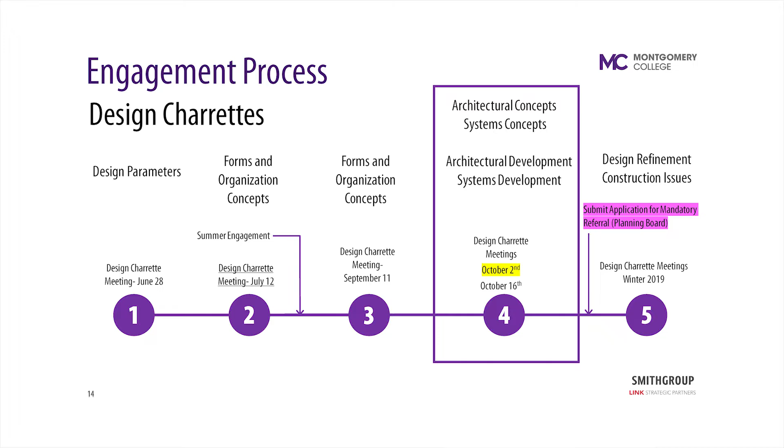Before I turn this over to Bob, let me just remind you we're in stage 4 of a 5-stage process, so we're making some really good progress together. I want to highlight that we have another meeting coming up on October 16th, but I don't want to understate the fact that this process has been moving along. So if there's something you've been holding inside that you really wanted to make sure we know, tonight would be the meeting to let us know.

Or in an email or a phone call in the near future, because we are moving to making one determination together and then moving something as an actual project into the review process. So make your voices heard tonight, bring in the feedback, and we'll keep going from there. And with that, I'll turn it over to Bob.

Thanks, Michael. So again, my name is Bob Bull. I'm a principal with the SmithGroup here in Washington, D.C., and we are the architects and engineers for the Montgomery College Math and Science Building.

One thing I wanted to point out on the schedule too, as Michael was saying, we're on October 2nd here. We have one more meeting in 2 weeks to talk more about the design. You're going to see a very developed design already tonight in some of the later slides, around slide 110, 120. No, I'm just joking—we don't have quite that many.

But the important thing to note is that we were going for mandatory referral after the 16th, October 16th. That is a county requirement that we submit our design for their review and consideration. There will be opportunities to continue to engage after that point, and we're targeting the winter of 2019.

As Michael was saying, this is a really important stage in the process to glean the important feedback that you guys all have, so that we can inform the design with those comments. We're at a really critical stage between this meeting and the next meeting. Hopefully you guys are all on board with us, and we can make it a fulfilling process and rewarding for both sides.

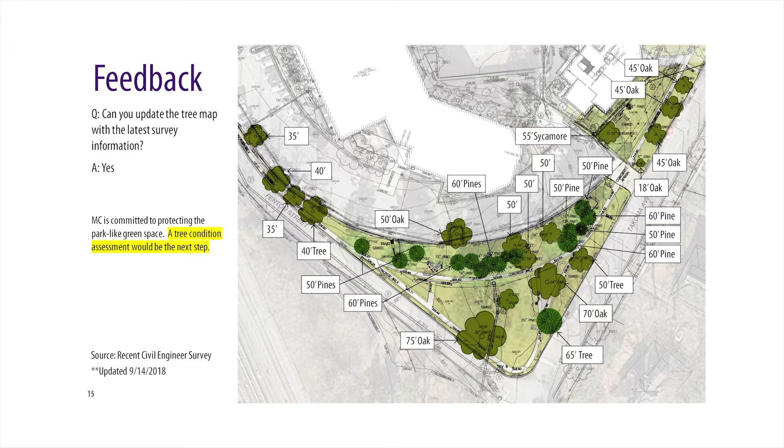We've gone ahead and updated our base information, and all the renderings and images you'll see from this point forward will include those 3 trees.

There was also a question about where the site context information is coming from. We go through this kind of exercise quite frequently with campuses and other clients with very complex context situations.

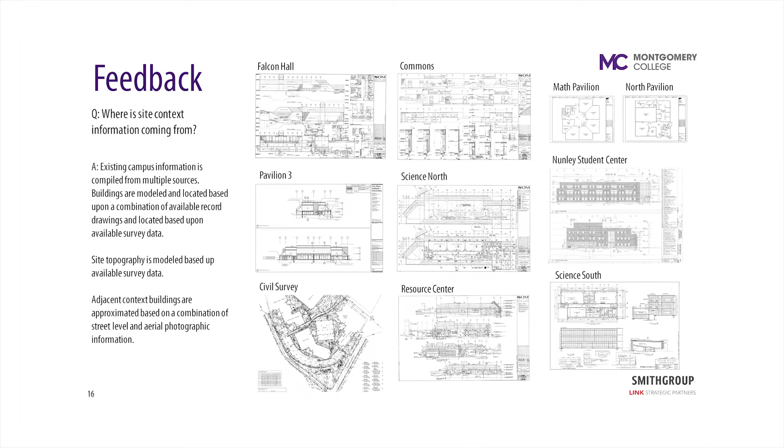We've done pretty exhaustive due diligence on the existing buildings on the campus and surrounding area, and compiled that information into the 3-dimensional tools we're using to represent the designs we're sharing with you tonight. There's a high level of accuracy underlying the imagery, coming from detailed building construction drawings, surveys from the civil and landscape team, and records from the county and other agencies.

So we can really trust and be assured that the information you're seeing is actually depicting the size, mass, bulk, and design that we're proposing, and it should look very much like what you're seeing on the screen tonight.

So we'll do a little recap of the last design review from September 11th. We'll move through these pretty quickly, but there were some original design directives that we started this process with.

We wanted to keep the current setback of existing Falcon Hall, which is basically that 110-foot setback from the curb line of Takoma Avenue.

We wanted to protect the park-like green space on Takoma Avenue, that triangular area I mentioned earlier, where the existing trees and landscape are staying intact.

Minimize the windows along Takoma Avenue, so from the vantage point along Takoma Avenue, we minimize any kind of light trespass that would occur in that area.

Ensure that height is no more than 2 stories on Takoma Avenue. This is where we developed our own methodology for measuring height - we established a 70-foot setback from the 110-foot setback, which is that 2-story building zone we're limiting the current design to.

Take advantage of the existing topography to minimize the perceived height. One interesting site characteristic is a 10-foot grade change from Fenton Street down to the tennis court area, and we're using that to basically conceal one story of the building height in the concepts we've shared previously and tonight.

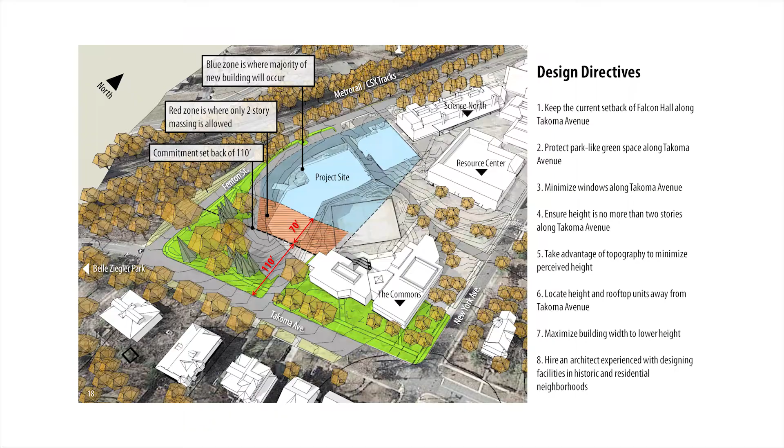Locate the rooftop units away from Takoma Avenue, so essentially all the mechanical equipment would be organized close to Fenton Street and away from the residences on Takoma Avenue, and then minimize or maximize the building width and lower the height.

And obviously we are the architects that were hired, so we don't need to talk about that anymore. One important aspect we'll reiterate over and over again is that this is the new age of math and science - we're doing a building for the future, not for the past.

There are specific design elements and components that must find their way into this building that many of us who went to school 20 or 30 years ago wouldn't recognize, but they're critical to the success of this program going forward. A lot of it has to do with active learning, team-based work, engagement with students, faculty, and outside community members within the building. All of these elements drive a different planning model than what we may be reflecting back on from 10, 20 years ago.

Another very important aspect is sustainability. In the architecture and engineering industry we use LEED often to measure the sustainability of our projects. This project will be at least LEED Silver as measured by the U.S. Green Building Council. We'll begin to see, in some of the images tonight, some of the first elements of that sustainability approach manifesting itself within the design of the concepts we'll be showing.

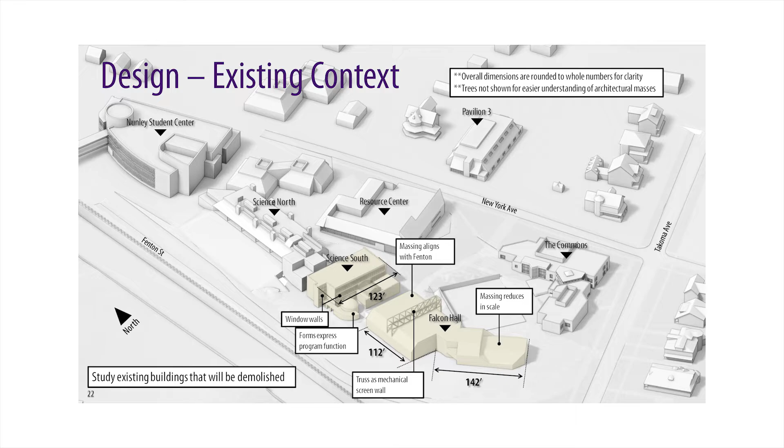Obviously Falcon Hall has a very interesting mass. We can argue whether it's successful or not, but it has a diminished presence off of Takoma Avenue, and that's one of the important aspects we've heard from most neighborhood constituents needs to be maintained going forward. Then there are specific elements within Science South, its window walls and its massing and form expressing the planetarium, unique aspects that we may lean on and leverage in the concepts we develop going forward.

An important aspect to understand is that this site on the campus, between Fenton Street and Takoma, has two distinct faces: one organized along Fenton Street and the other along Takoma Avenue. The general architectural context as you come south down Fenton is distinctly different than what you see coming west on Takoma Avenue.

So north on Fenton, you have the Nunley Center, which is 217 feet wide, and Science North, which is 280 feet wide—significantly long buildings with a very significant presence as you approach from the north going south. That's represented by an organizational rectangle here.

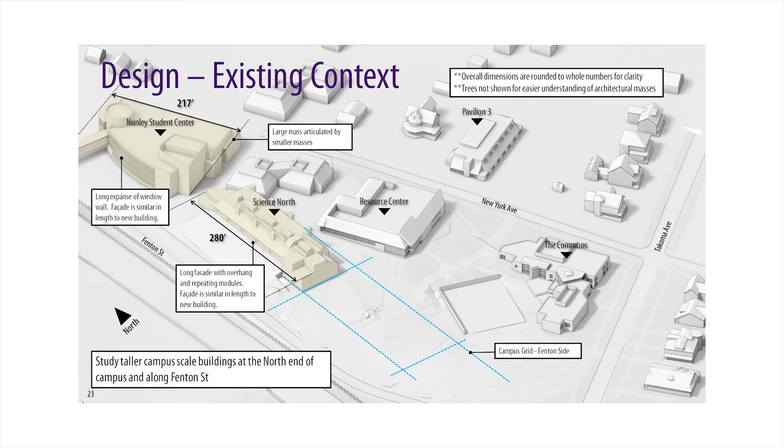If you look at the other buildings from the east—the Resource Center, the Commons, Pavilion number 3, and also the residential context—there's a distinct departure in the massing and organization of those buildings. There's less of a linear rectangular organization, more of a square organization with dimensions more like 150, 165, or 148 feet, radically different than what you see on Fenton Street.

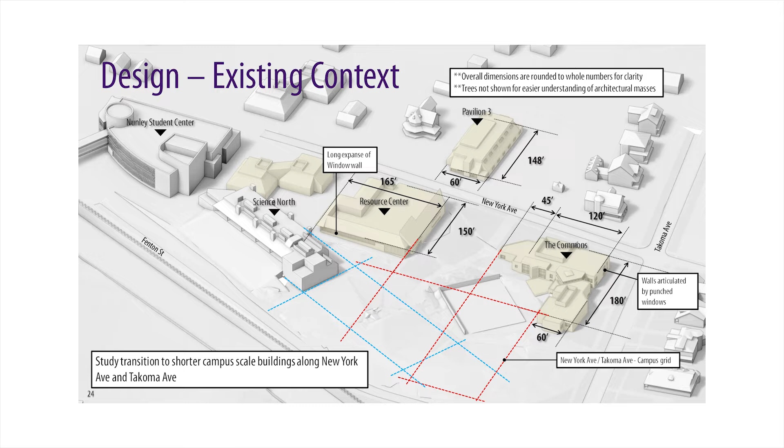What we're beginning to understand is there's a unification of those two sensibilities on this project site—a convergence of this longer organization along Fenton and the smaller scale, more squarish organization coming off of Takoma Avenue. This is sympathetic with the residential character you see across Takoma and across New York. You'll see how that informs and influences the design as we develop the architecture further.

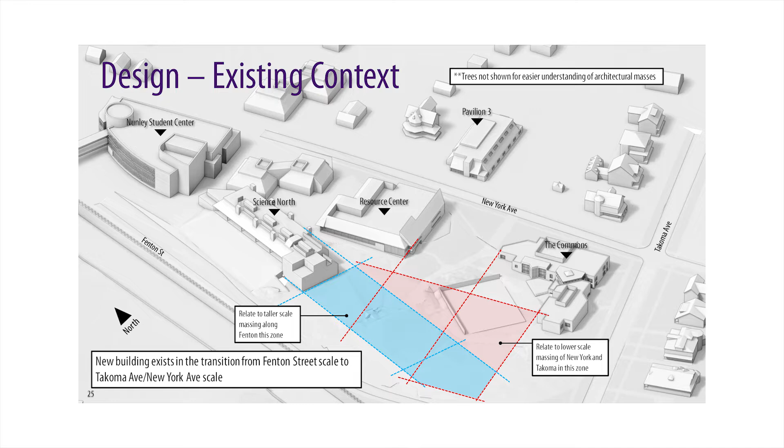Looking further into the existing context, the materiality from the existing campus and neighborhood ties together already pretty well. There's a strong dominance of brick on the existing campus and earth tones. The Nunley Center has a lot of beige and brown brick, the Commons has a lot of beige or brown brick, and Pavilion number 3, one of the more recent constructions on campus—on the other side of New York Avenue—uses a terracotta tile very similar in coloration and tonality to the beige brick seen elsewhere on campus.

There are other elements we're looking at too as we understand the campus, including what comprises the material palette of the residential areas on the other side of Takoma Avenue. It's a radically different scale shift in the architecture, but there are elements that tie across the street, like the landscaping, native planting, and lush greenery—elements we can use to tie things together. There are also lots of stone walls, garden walls, and similar elements with a residential quality that translate well to an institutional campus setting. You'll hopefully see how that works in some future slides as we look at concepts.

Sorry. No, I got it.

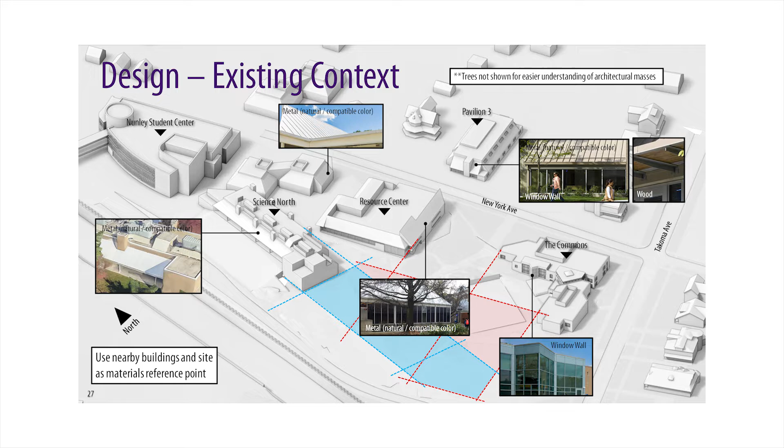There are a couple other materials on campus we'd like to note. On Science North and the Resource Center, there are sloped metal roofs with standing seams, which may find its way into the material palettes we present later. There's also what we call window wall or curtain wall, large assemblies of glass and aluminum, to maximize transparency where it's important on particular parts of the building facade, facing campus in this situation.

In summary, this is what we refer to as our material palette or material collage. This represents the tonality of the material experience when you're on campus or in the adjacent neighborhood, the starting point for thinking about the materialization of this building. How will it be rendered in different materials? What will we use as a guidebook to pick those materials, and what colors should we look at to find something that works well within the existing context?

So we're looking at brick in native colors, earth tone colors. We're looking at terracotta, which could also be in a brick tone. There are some elements of natural wood that we might find in the new building, evident in Pavilion 3, as we were talking about before, plus the curtain wall or window expanses you see in several buildings on the existing campus.

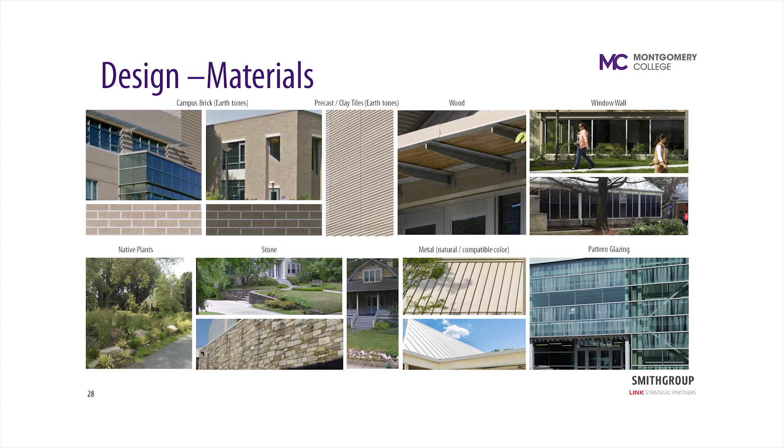Also on this building, how is that curtain wall treated? One advantage of this glass assembly is its screening. There's a material called ceramic frit applied to the glass that helps reduce solar gain in this instance. And again, the sloped metal roofs and site context, the lush greenery and landscaping, and potentially some stone articulation and site walls. We're not going to hit on the landscape design tonight, that will be in hopefully the next meeting, where we'll understand more about how the setting for this new building will fit well into the campus.

Is there a question? Yeah. Sure, so...

Okay, that's a fair criticism. No, trust me, we're not excited about the glass, especially facing west on Nunley. I think when you see the options as we present them, we don't really represent a similar effect.

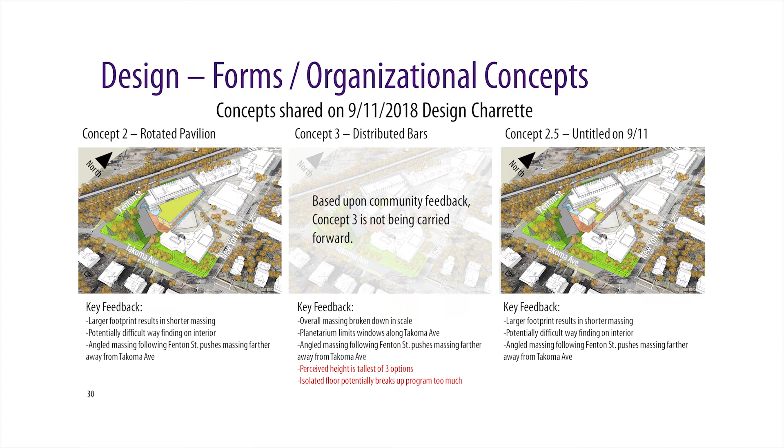So summarizing what we presented on September 11th, the three schemes: we had Concept 2, which we referred to as rotated pavilion, Concept 3, referred to as distributed bars, and then we introduced a new concept, 2.5, at that point untitled, a hybrid between Concept 2 and Concept 3. The big difference with Concept 3 was it was significantly taller on Fenton Street. We heard pretty unanimously that option was not preferred because of its presence on Fenton Street and how it dominated that part of the neighborhood. Even though it faced the tracks, it didn't feel like it fit in. So we've eliminated that option, and we're moving forward with Concept 2 and Concept 2.5.

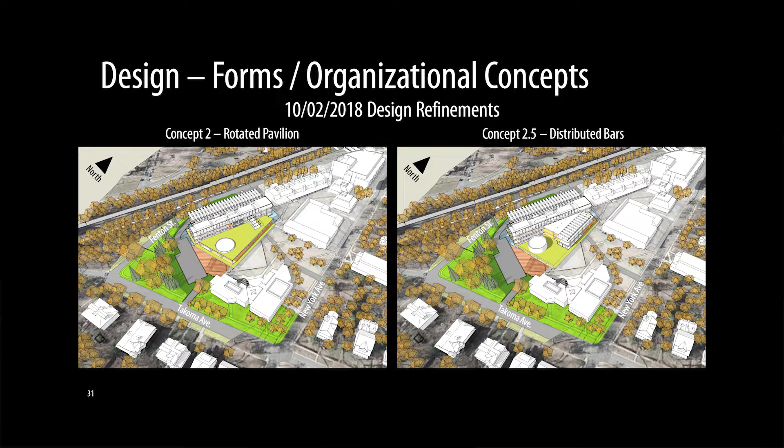So here are some new images. We'll go through each of these options: Concept 2 and Concept 2.5, which we've renamed distributed bars. One of the important things about the distributed bar scheme was that it tried to break down the scale of the mass by using different bar-like elements to reduce the presence of the building and the scale. So to make this less confusing going forward, we're going to say 2.5 is now the new distributed bar scheme.

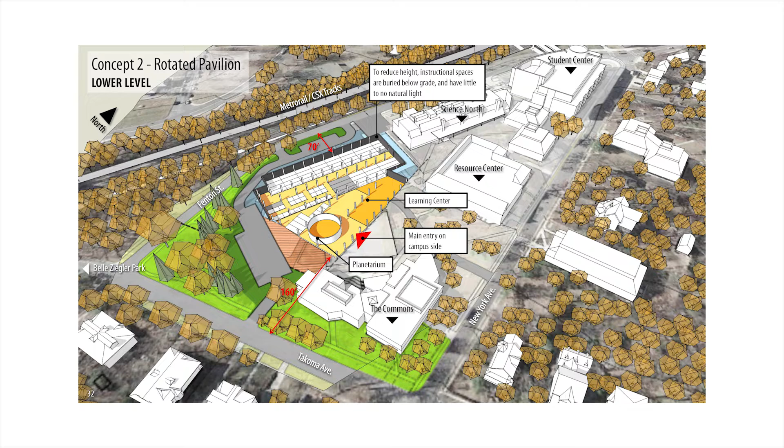And then some of the less lab-like, more student-oriented facilities like the Learning Center and the planetarium, which are more public-oriented, are all organized to be directly off the campus quad, or campus side of the concept.

So moving up, we've added one story on top of this model. You'll see the planetarium is a two-story element, beginning to show that two-story drum-like shape coming up through the building mass. Again, more labs are organized on the Fenton Street side and the Student Learning Center on the campus side. On this upper level is where you can walk right in from the north side of campus, so this is the primary campus entry from the north coming to the south. So there's entry here, and then there's an entry on the drop-off that we reviewed at the last meeting.

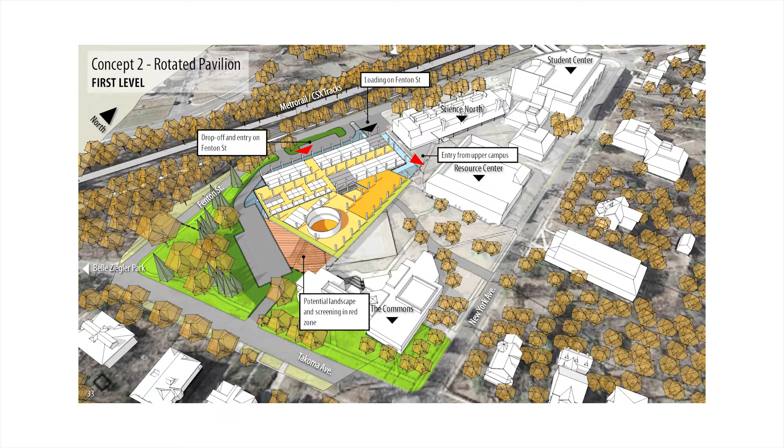And then as we go up one additional story, more labs on the Fenton Street side. And here this is a completed roof plane or pavilion, thus the name rotated pavilion. On top of that pavilion, you'll see what we're beginning to show is a greenhouse, which is part of the program with the academic portion of the program.

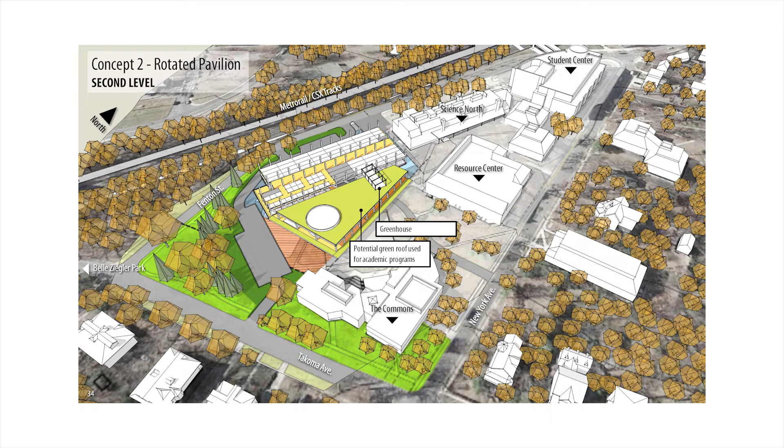And here's the completed building. Again, what you're seeing here is kind of the bones of the building in almost X-ray form. But there's a new organization here that we didn't share last time, which we'll reinforce with this slide and a few others later, in that we're organizing all of the mechanical equipment in an area of a rectangular bar closer to the center of campus, so that we aren't using any of the space directly adjacent to Fenton Street for the mechanical equipment, which is really the tallest part of the building mass.

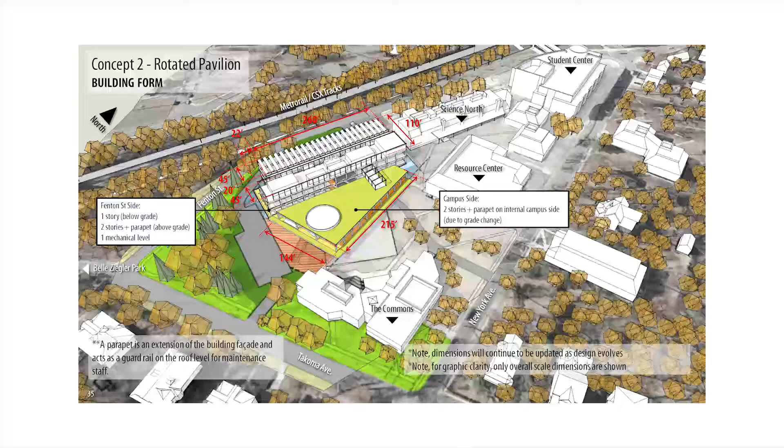So that moves away from the edge of Fenton, closer to the center of campus. And then all of the rooftop space directly off of Fenton Street, what we're showing here is a photovoltaic array that would be used on the rooftop to be almost like science on display. There are examples of photovoltaic arrays elsewhere on campus, one just right across the street here. This is meant to be a very intentional assembly of those photovoltaic arrays in such a way that it contributes to the character of the building and gives it an architectural expression commensurate with the program within it. So again, science revealing itself on the outside of the building, not just on the inside.

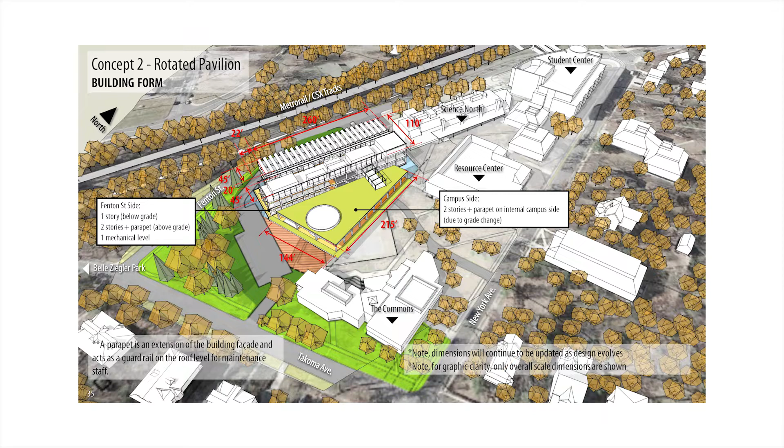Comparing this concept with what we saw on the 11th: what was shown on the 11th is on the left side, what we're sharing with you tonight is on the right side. You can see the organizational element, the lower pavilion, is slightly different. This is primarily the reflection of some arm wrestling we're doing with the program—it's been tightened up and cleaned up, so this became a much simpler shape. You can see the planetarium is completely concealed within that rotated pavilion, but it does have a small expression poking up above the roof. There's that greenhouse I mentioned earlier, and the organizational concept of the mechanical space on the center bar, then a photovoltaic array on the outer bar closer to Fenton.

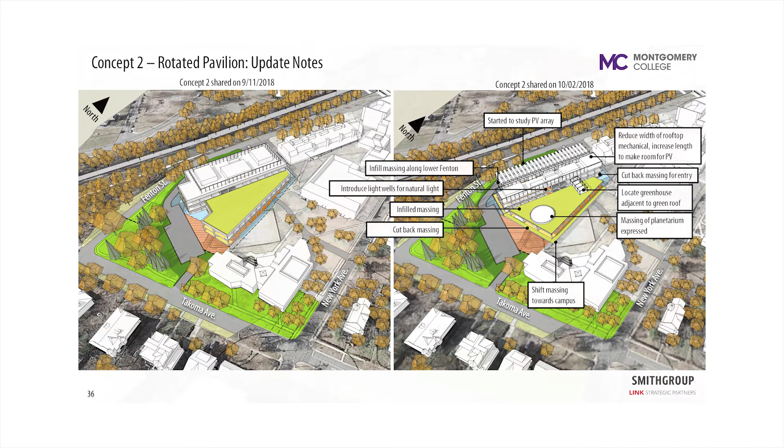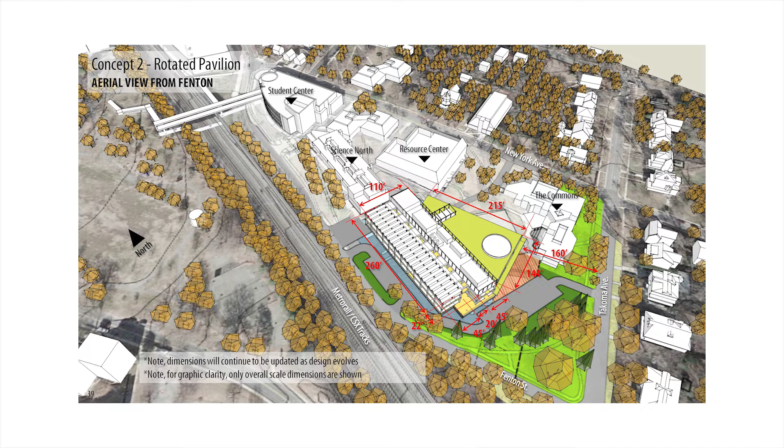Looking at it from above, we've added, per request, a bunch of dimensions around the building to give it some clarity. This comes with the caveat that we are still very early in the design phase—these numbers will change a little bit. We think these are very good, rounded guesses as to the size of the building. It will evolve; they'll grow by fractions of feet, maybe a couple feet here and there, but for the most part we think this represents a very safe guess as to the actual dimensions.

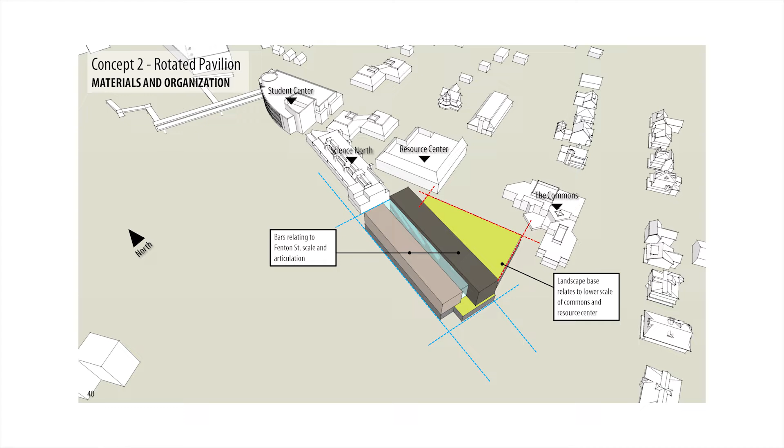One organizing element we're also using as we modify and develop the mass of the building is a horizontal base. This is meant to be reminiscent of some of those garden walls or site walls we find in the neighborhood, which work very well architecturally to reduce bulk and mass. So if you perceive this as a base or plinth with 3 elements resting on top, you've got the 2 lab bars and then the pavilion piece—the more glass and metallic piece—sitting on top of that base, mostly screened behind the trees off of Takoma Avenue.

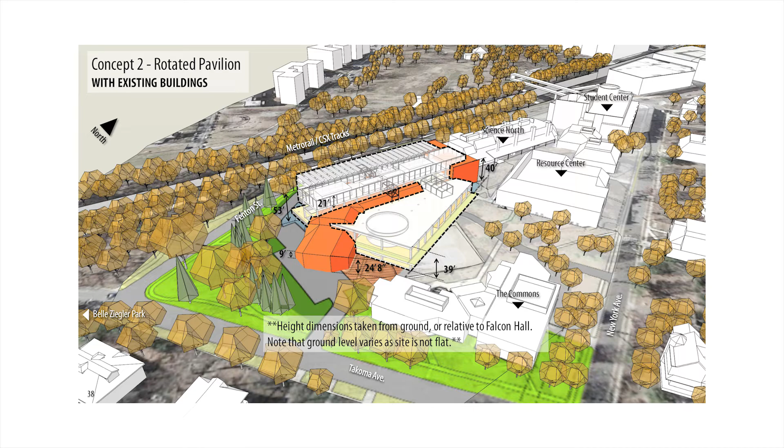This is the same height that we had shown last time, the same height we were originally showing here. This is all mechanical equipment that's above the building. It's all necessary to support the lab function within the building and the HVAC with the building.

Correct. So this is a screen wall that is concealing the mechanical equipment that is up above that level.

I don't see a wall there.

Yeah, contrast with what you showed before—it's different, very big. That's way big for a residential neighborhood scale. Just want to remind everyone we'll have time to get all the comments after this—we've got 60 more slides, so I want to make sure we get to that portion of the meeting.

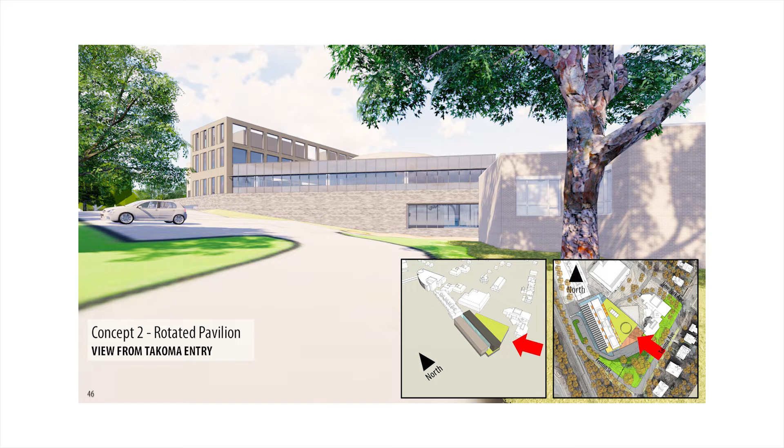One of the things we were really sensitive to here was trying to diminish the presence of the building as viewed from Takoma Avenue. This element is the closest part you'd see from the neighborhood, and making this as grounded and solid as possible was one of the architectural elements we tried to reinforce. Dematerializing the pavilion piece right above it was meant to diminish its presence within the neighborhood and try to ground the building, making it look as small and relatable in scale to some of the smaller buildings adjacent and within the context of the neighborhood.

And you can see the relationship that ties to the commons immediately adjacent to it. Here's a view from New York Avenue and Takoma—there's the Commons building, and you can see the new building poking up beyond. Regardless of where this mechanical equipment would be, whether on Fenton or on the central bar where we're showing it, this would essentially be the same view.

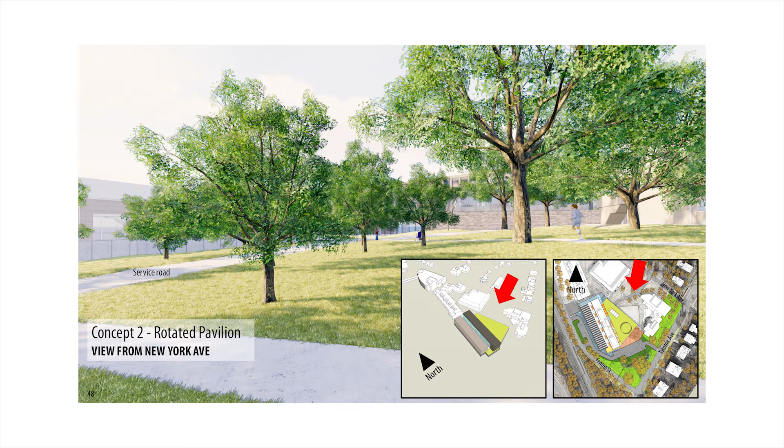Here's a view from New York Avenue with all the existing trees, and then the embellished view, removing and screening out the trees. You'll see again that articulated base, an entry from the lower campus level, a lighter dematerialized building element sitting on top of that base, and then that mechanical screen above. You can see a bit of the greenhouse also sitting on the roof plane of the rotated pavilion.

Does it make a difference whether the solar arrays are on the part facing Fenton versus the other? The orientation is better on the west side, yes. So where they are currently shown has the most desired effect.

What's the desired effect? In terms of solar power producing. If they were to shift it to the middle, and the taller building element was there, then the taller building element would shield them for the majority of the day, and they'd be in shadow, and they wouldn't work.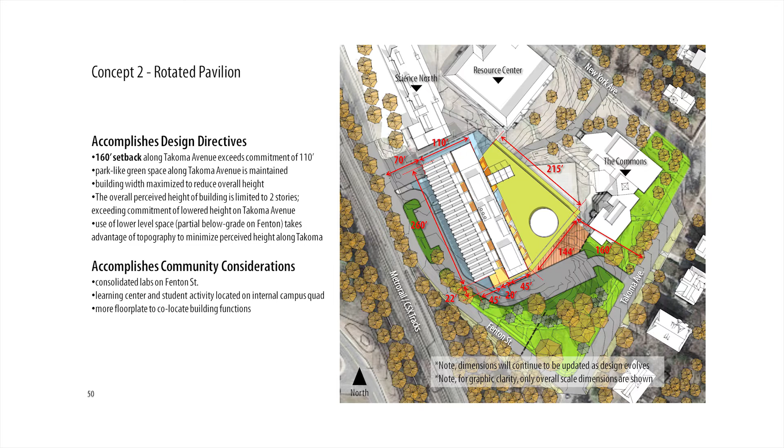So moving on to concept 2.5, a very similar series of slides here where we build up from the ground: first level submerged below grade, entry off campus, 70-foot setback from Fenton, and 160-foot setback off of Takoma.

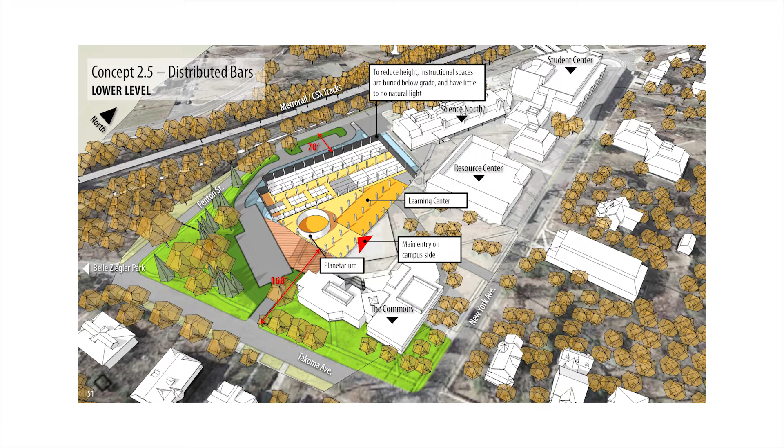Here the planetarium is embedded within the building, but as we move up, it becomes a standalone element that breaks free from the building mass. And the greenhouse also becomes an articulated building element on the campus side of the facade that faces the quad.

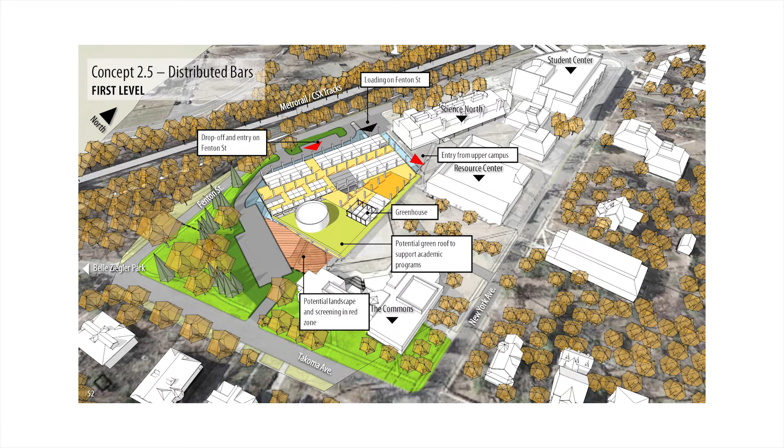The lab portion of the building is similarly organized in this concept off of Fenton Street with 2 layered bars. Moving up 1 additional story, again, the planetarium breaks down the mass with a cylindrical shape.

We looked at a variety of different shapes. One of the things that really had the least imposing presence on the neighborhood was the drum shape, because it sort of wraps around and eliminates the corners. And it is, as we talked about earlier, one of the only programmatic elements that does not require windows, so there would be less light emitting from it and potentially disrupting the neighborhood.

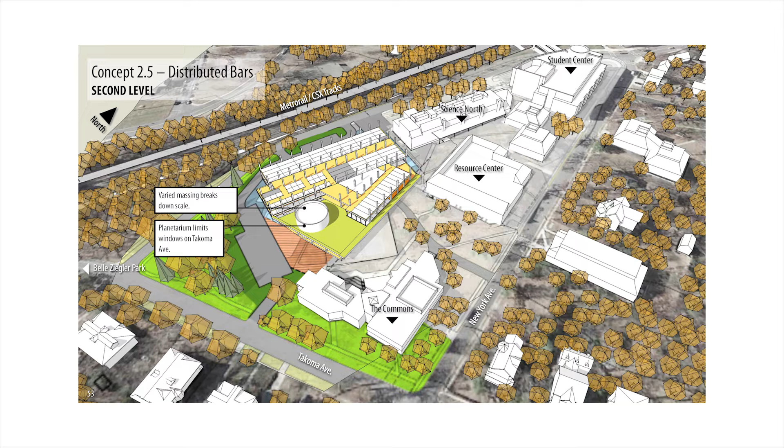And then the completed building mass. The important aspect where this one is different is it's lower on the plinth part here, but most of that building area has been shifted to a multi-story element that represents a taller portion of the building on the campus side. This concept is essentially the same as concept 2.

So the 2 bars that are organized off of Fenton with mechanical space and the photovoltaic arrays are essentially the same.

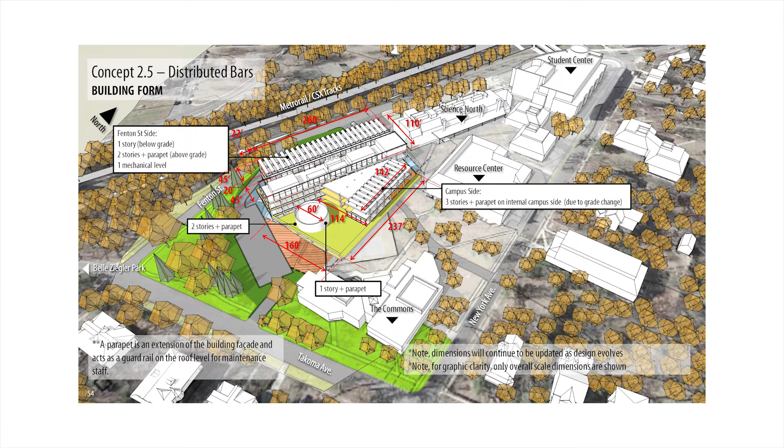So the comparison between what we showed on September 11th and what you're seeing today: here's what we showed on September 11th, here's what we're showing today. The primary difference is, again, that lower bar on Fenton, the mechanical space in the middle, and the slight difference in how the plinth and the planetarium engage each other, and then somewhat different massing in the center of the building, again, related to us trying to program out some of the internal functions within the building, getting them to fit in a reasonable way within the footprint that we've established.

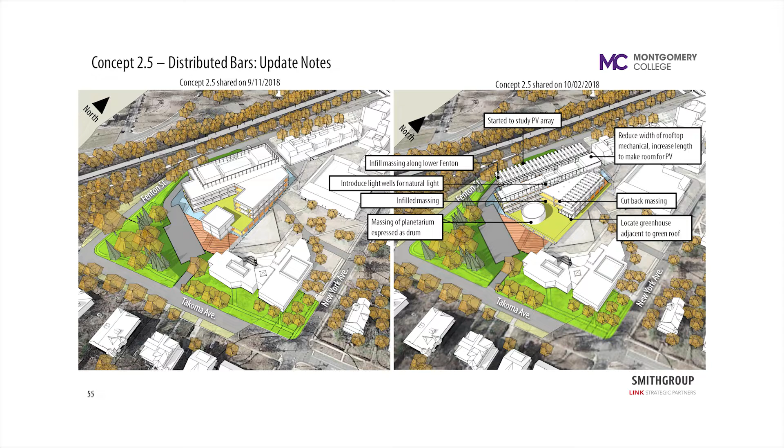And again, the comparison of option 2.5 with the existing Falcon Hall. Here you'll see, again, the very diminished presence of the building as viewed from Takoma, but a much larger presence of the building pushed towards Fenton Street.

Here we have a 55-foot building elevation from the campus, and here we're saying 53 as measured from that corner up to—is that to the screen wall? Yeah, I think that was intended to be from the screen wall on that dimension.

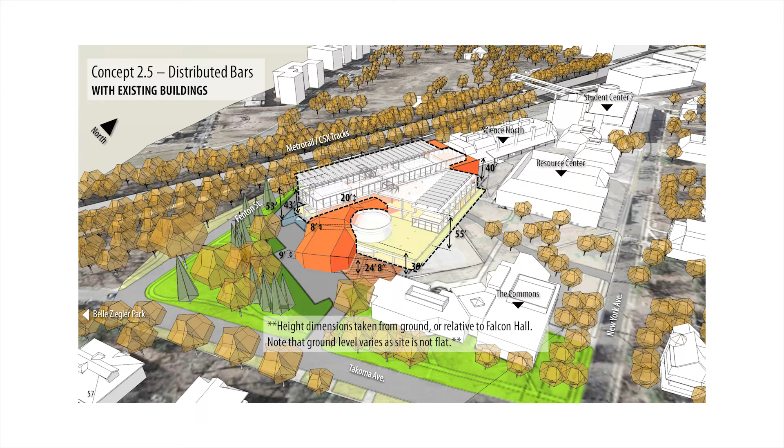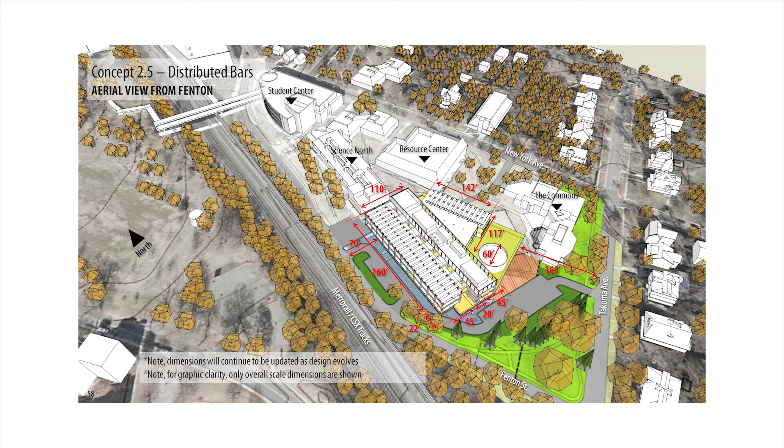And then the overview again, with dimensions and plan. The big difference here is that all the building elements, as they're organized on the campus side, are slightly different. Some of the mass has been reduced here and pushed into a taller building mass, revealing the planetarium as an articulated element viewed from Takoma Avenue. This allows a scale and shape relationship between the planetarium and the residential structures across the street that is immediately relatable. There are also scale similarities with this plinth, the commons, and the resource center that tie together all these elements, as discussed in earlier diagrams.

Yes? There's one issue I have with the planetarium. It's 60 foot in diameter. It was a 60-foot box before. But if we're going to have a 55-foot planetarium dome in there, it doesn't leave much room.

Okay, so I think we actually have a planetarium expert on our team who's going to guide us through some of the key metrics that need to be developed as the design gets more advanced. So this 60-foot dimension is our rough guess right now. We may have to adjust it as we go forward and learn more details.

This somewhat relates to planetarium placement—there's an area that's 142 feet long, 3 stories. And if you were to extend that level, even with the end of the planetarium, the corner right there, across to the other side—would you be able to keep it to 2 stories? In other words, if that 142-foot length were to extend toward the front of the building all the way, coming through on the other side of the planetarium as the center portion—that's essentially concept 2. That's what it does.

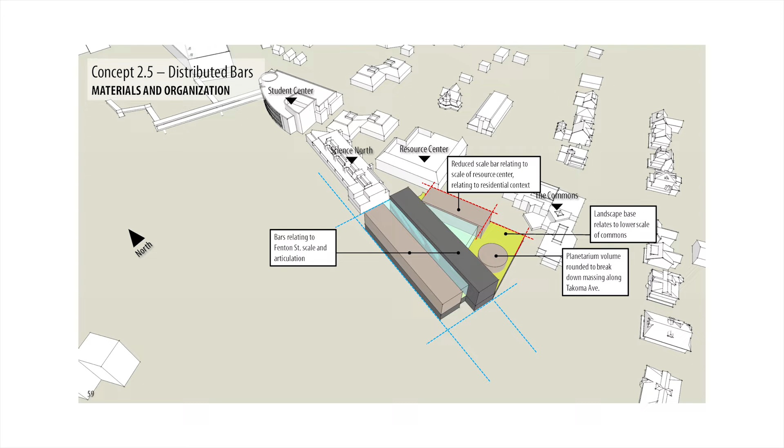Looking at the organizational diagram again, there are two distinct bars off of Fenton Street, with a corridor connecting them. There's a slightly different play with the building elements as they face the campus, the planetarium being part of that, and the lab/office bar facing the campus is a bit taller in that section. But there is a significant step down towards Takoma Avenue and the residential community.

Oh, sorry. One difference with concept 2 would be that you'd still have some sort of standalone structure for the planetarium rather than it being embedded within the entire structure. You'd still have some portion separate, which would help break up the square mass. You probably could do it—it would take pushing the planetarium closer to Takoma Avenue to get it to be separate and distinct. You could come up with some kind of alternative similar to that if that was a preferred direction.

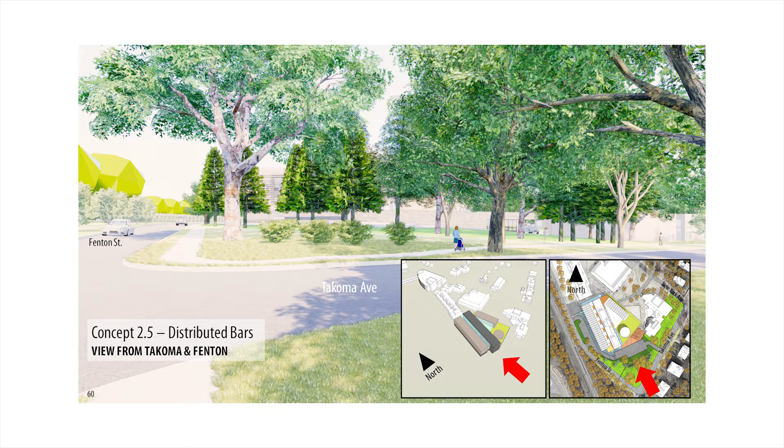Looking at the eye-level views of Takoma Avenue and Fenton Street, with the trees and without, you'll see with this concept we've begun to articulate the mass and the bar on the Fenton Street side a little differently. If you remember from a few presentations ago, we talked about how solar orientation was very important on this part of the building, so you'll see animated screening devices architecturally used to help accomplish that screening.

Yeah, the challenge that we're having right now is that we would quickly run out of space for the equipment we need to put up there. That's the challenge.

Is there a reason why all the mechanicals have to be on top of one of the bars? For example, the southern third of the mechanicals on that central bar could be located on the other bar that's along Fenton, but toward the back of the northern end.

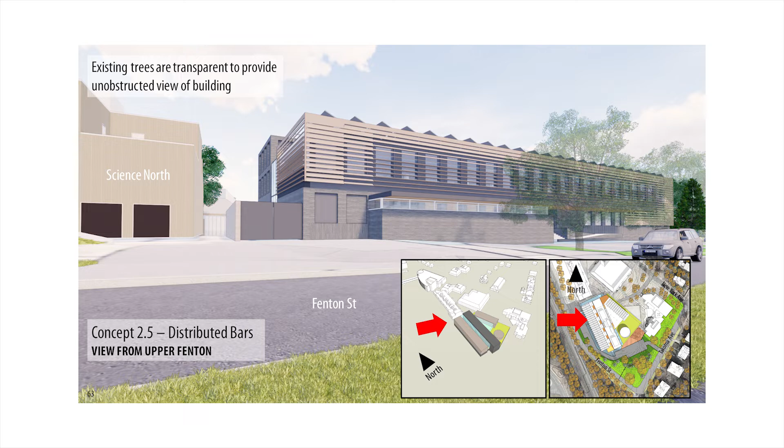A very different kind of horizontal shading articulation here than in the last scheme. Looking further up Fenton Street, you can sort of see some of those photovoltaic arrays poking up above it as you get further away from the building.

And the portion of the taller element of labs and offices right off the campus, setting in the background there. The view from further down Takoma Avenue past New York, you're seeing a bit of that building element poking out above the Nunley Center.

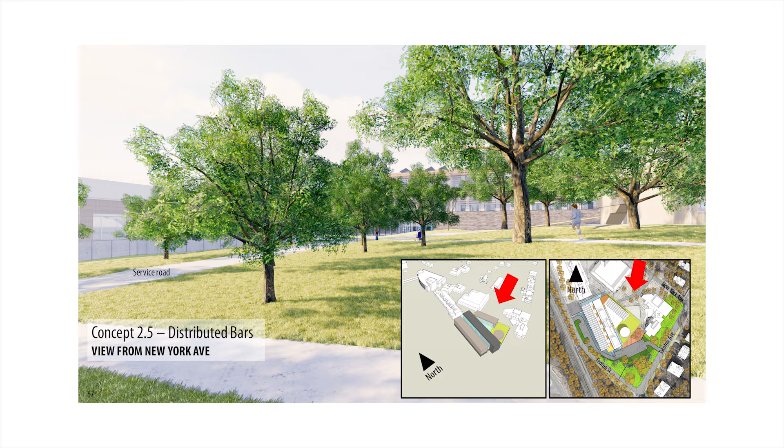I'm sorry, the Commons. Then looking at the building from New York Avenue with the trees, and then without the trees. Here you see the big difference: in option 2, the two-story element gets removed from here and stacked on top of that other one-story element there.

And you're getting a bit of that photovoltaic array peeking out from above the roof from there.

And again, the summary slide looking at how the building is organized off of Fenton Street: the layered bars, the rotated office lab component off the campus, the separate planetarium element, and the base that is facing Takoma Avenue.

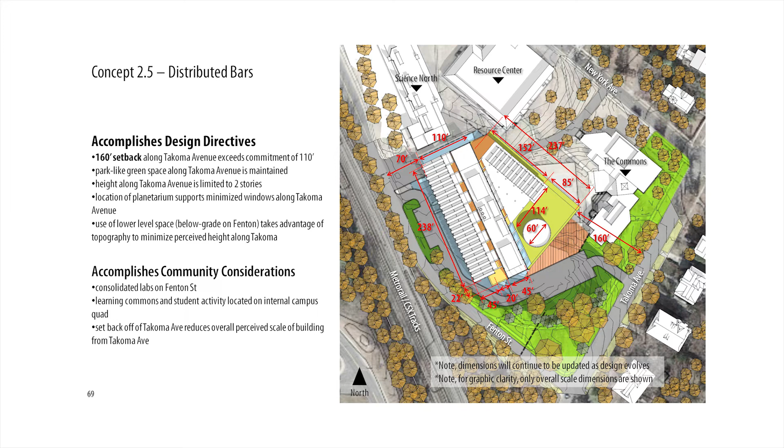Again, a significant reduced presence of the building off of Takoma Avenue, especially since the original commitment was to have a setback closer to 110 feet, which is 50 feet further towards Takoma Avenue.

All right, so now we're going to go through some very quick form comparisons. The rotated pavilion on the left and distributed bars on the right - option 2 on the left, option 2.5 on the right. And here they are side by side as they relate to the existing Falcon Hall.

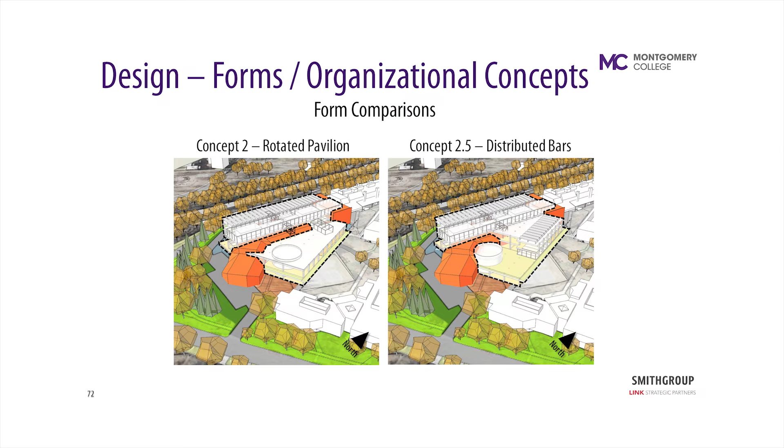And here they are in the overview, and then the view from Takoma Avenue. And then with 2.5 from Takoma Avenue - I'll go back one.

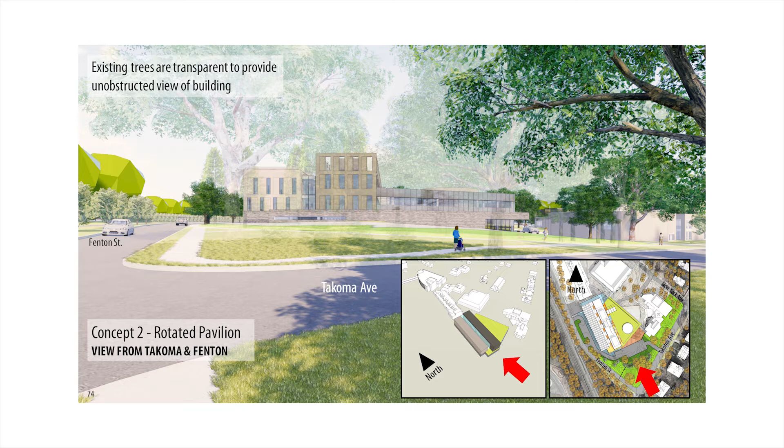So here you can see the big difference is essentially right here, where you have that one-story element sitting on top of the base. Here that one-story element goes away and the planetarium is revealed, but the building mass beyond grows to accommodate the difference in area. And then side by side.

When we get into the breakout groups, these images are going to be the basis of that sort of presentation, so you'll be able to see these side by side in the print. Okay.

So perspectives are never to scale because they're relative to perspective. All the plan drawings are to scale, and that's why we put the dimensions on them. Perspectives are not to scale, just like photographs are not to scale, but they are relative in scale to the components.

Right, they're relative to each other. Yes, exactly. How high...

So we're guessing it's 60 feet tall. So Nunley is significantly taller.

There's a question? Yeah, there's many questions actually.

I had a question about you bringing up trying to reduce the light coming out to the neighborhood. I didn't remember that being a principle in our versions of that. Honestly, from a person who lives across from there, this feels a little more dark and ominous on the right than the left. I was wondering if that was the perspective you thought the neighborhood wanted.

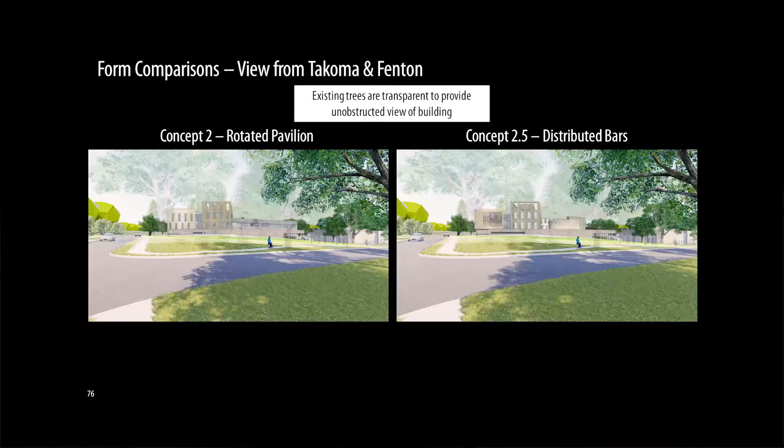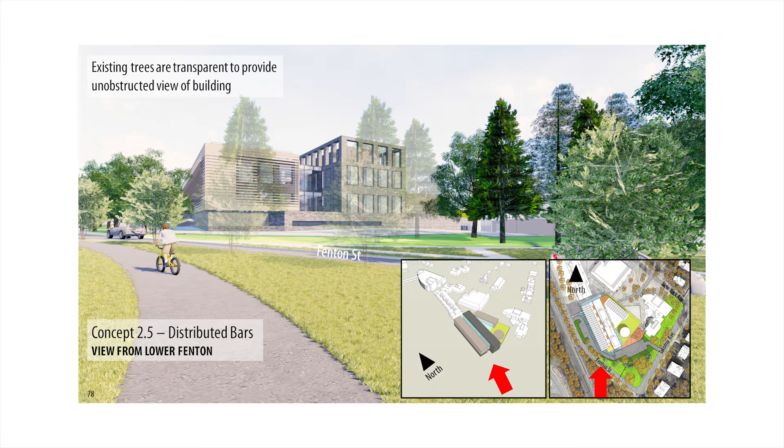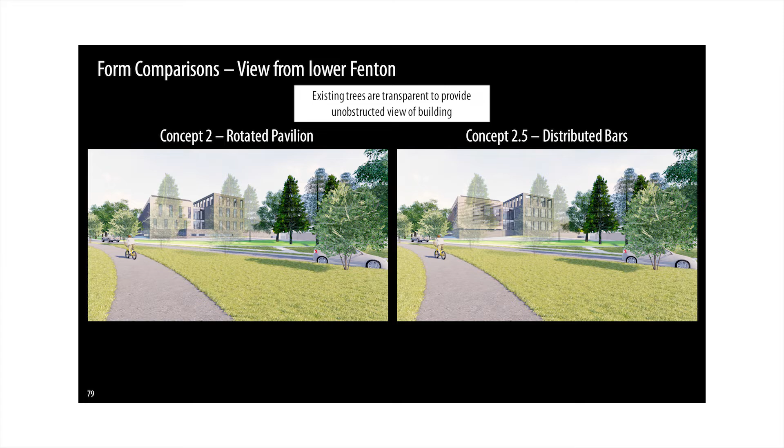Let's move through looking at the Fenton Street side. Here's option 2, option 2.5, and you can begin to see how the transparent window portion is that vertical element there. And then the side-by-side comparison—you can see a couple of different things we're experimenting with, like how the screen wall is articulated on the top level, and how we might handle that differently depending on which option we go with. There are a million other options we could study too that would further dematerialize the presence of that wall.

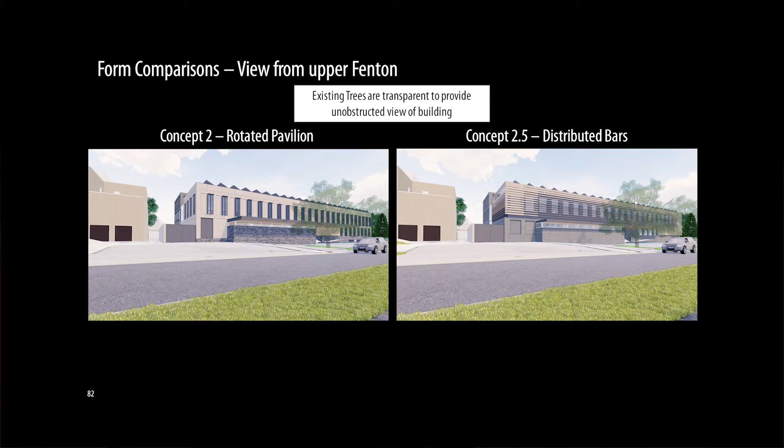And then the view from Fenton at the loading dock, the two different options, and the side-by-side between them. Again, this facade is really being driven by a solar shading concern—we're trying to minimize the heat load within the laboratory spaces.

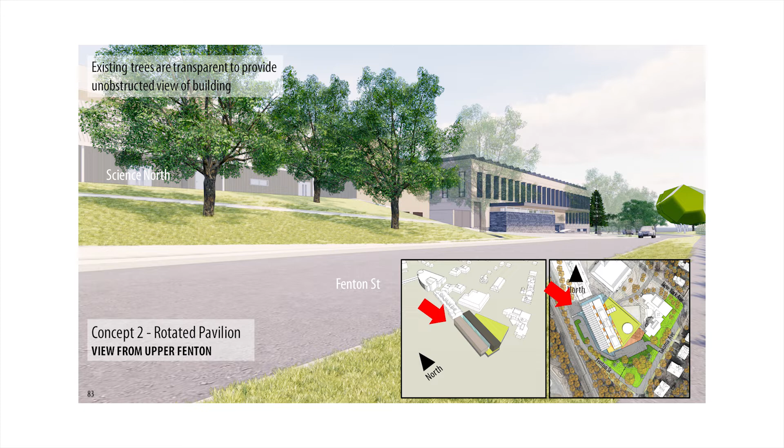Further up Fenton, as you approach, again showing the relationship contextually to the other buildings along Fenton Street, and then with 2.5 and the different shading approach, then the two side-by-side. Then side-by-side from Takoma Avenue, and then from Takoma Avenue past New York—you can see these two are very similar, barely a difference there.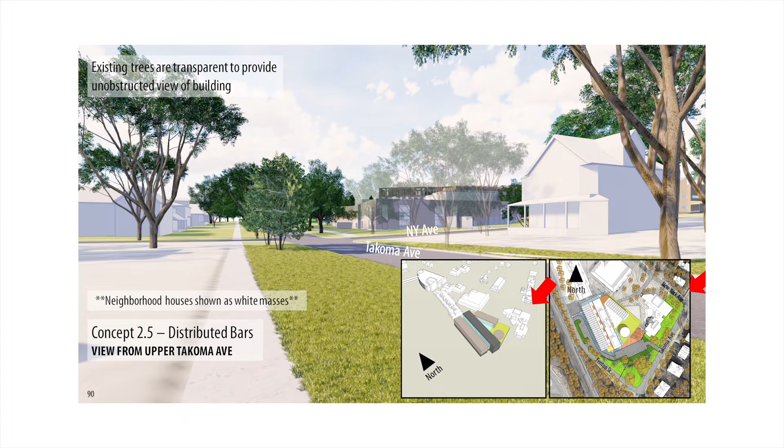Shading elements from the Takoma side—that is something we talked about. There's a shade shown on top, if I can go back that far. So there's a shade shown here, and there are shades shown on these windows further back. There aren't many windows here, but there is a projected shading device around the edge of that window. You can't really see it well, but you can see the shadow of it there.

Oh, okay. So the laboratory venting occurs in this mechanical space. It's actually organized towards the northern end of this penthouse space.

No, it goes straight up. We talked about this at the previous meeting—there's an entrainment expert on our team that studies this specifically. They built a model to study air patterns around the existing site and the new building, and they've already done a conceptual review of the site, recommending putting the exhaust towards the northern end of the Fenton Street side, which is currently where we're showing it. Right now it's just conceptual; there will be a more detailed report at some point. Okay, well we can work with the university on that, or with the college.

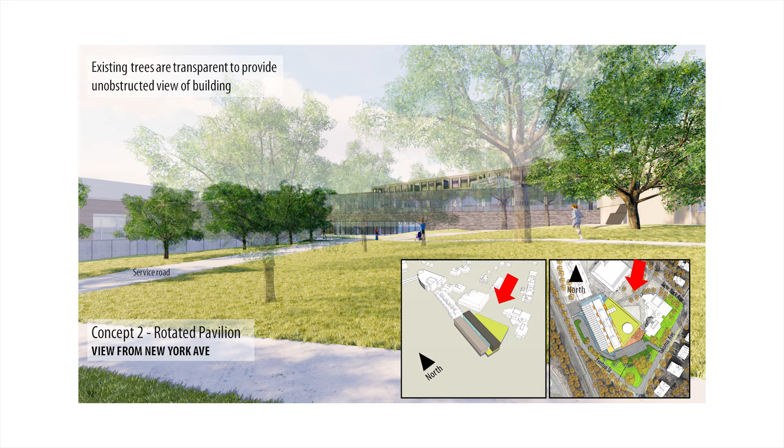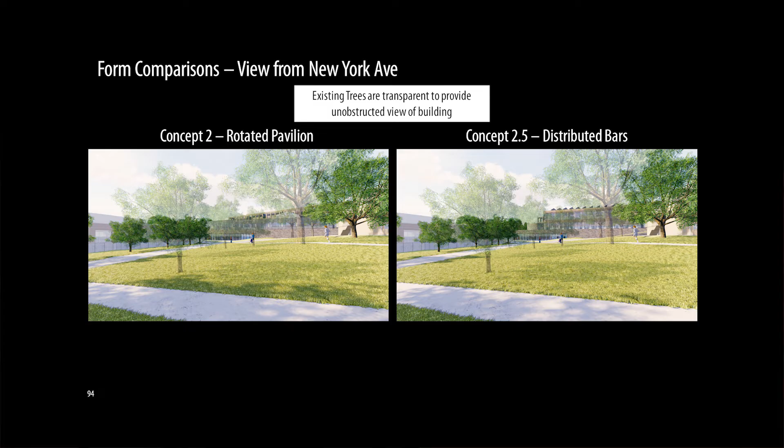Okay, so going forward, we reviewed this. Here's the view from New York Avenue, and then for concept 2.5, and then the side-by-side comparison. And that's it - 110 slides, 95 slides. 95.

Okay, any general questions for Bob before we jump in? Because I want to get to small groups, but any overall questions?

Very briefly, as a resident member of the neighborhood, I think our focus has been all along on putting as much mass on Fenton as possible. I've been at the other charrettes, but unfortunately this is the 9/11 one. I'm just curious, from who was the input to lower the height?

So on concept 3, we had quite a bit of additional building mass, a whole additional story on Fenton. It was universally from all of the groups that I had heard from, and I thought pretty generally, that there was too much building mass on Fenton, that the building was too tall. That's why we eliminated that option. So these concepts take that one step further.